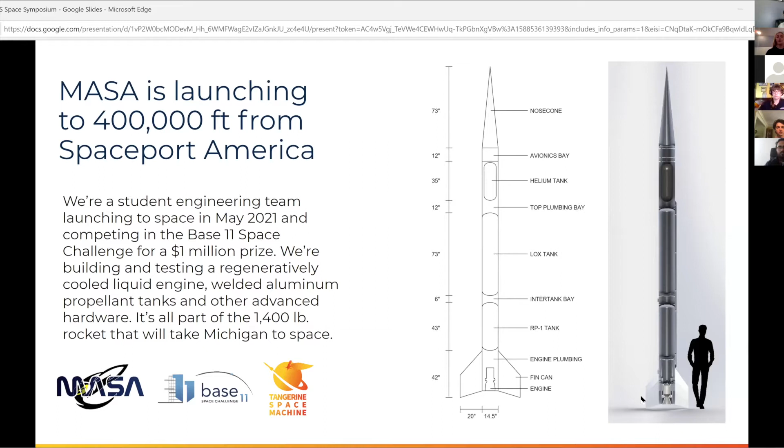So we are competing in the Base 11 Space Challenge for a $1 million prize. We are building and testing a 1,400-pound rocket, and we are planning to launch the Tangerine Space Machine, which we refer to as TSM, in May 2021. So TSM stands 27 feet tall and 14.5 inches wide. The engine uses RP1 fuel and liquid oxygen oxidizer. It effectively produces over 4,000 pounds of thrust, and it has a specific impulse of 211 seconds.

Our team is comprised of 6 sub-teams: Aerodynamics and Recovery, Structures, Propulsion, Avionics, Production, and Assembly, Test, and Launch Operations. The image above illustrates the main components of the rocket, and the sub-teams work on these components, and ultimate integration will lead MASA to a successful launch. So now Jack, our chief engineer, will discuss our work on aerodynamics and recovery.

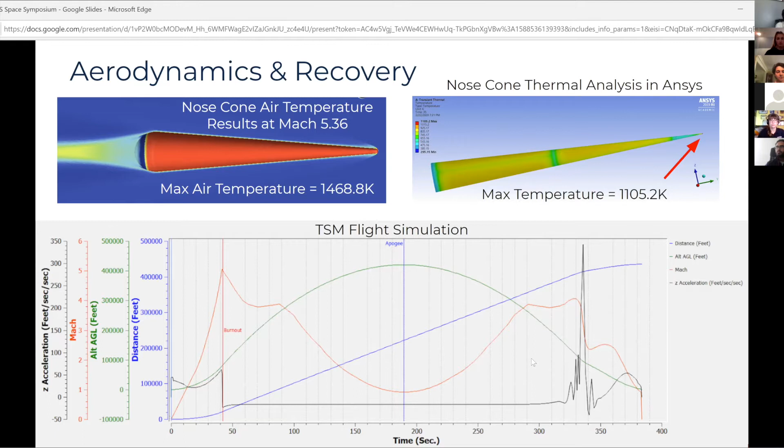Over the past year, the team has also made significant progress on fin design. The fins on the rocket are used to provide passive stabilization. We don't have any active stabilization. The fin design we have chosen is a 3-foot long trapezoidal fin. We want this design because it's easily manufacturable and it uses a continuous panel from the fin to the rocket body. So on the right there, you can see the render. That's all one piece that's bolted at the fin edge.

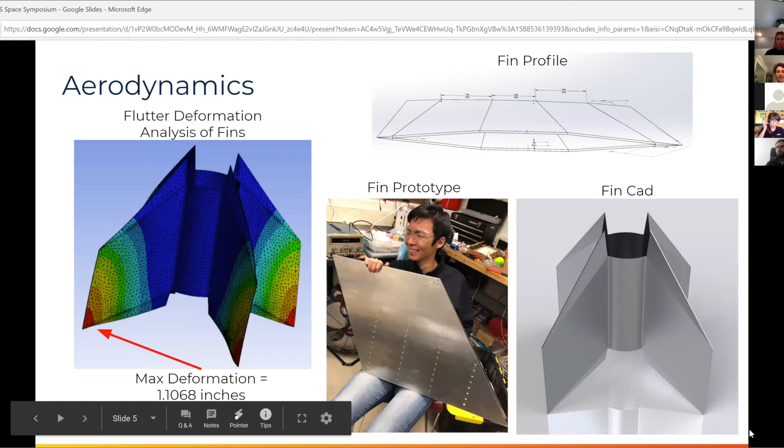But one of the largest problems designing fins is preventing flutter, which is essentially a high amplitude vibration. So on the left, you can see a picture of an ANSYS simulation that we used to predict the deformation of the fin due to flutter. The prototype, also pictured in the center there, was a small scale model that was very useful for teaching us about the sheet metal manufacturing we'll have to conduct to build the actual full scale fins. And then, as I said, on the right is a current render of the fin model.

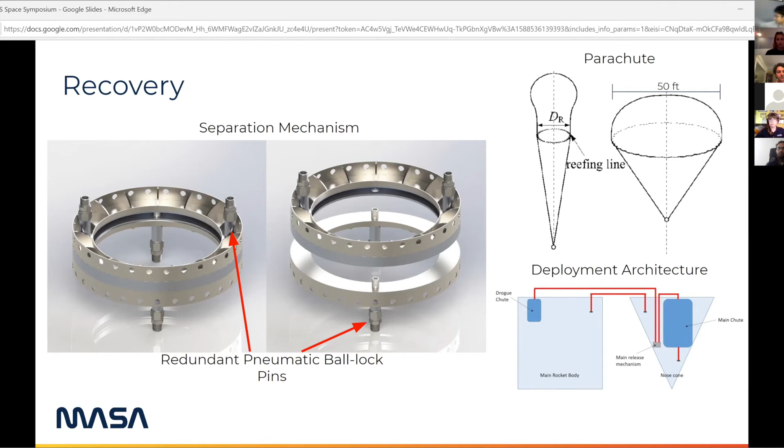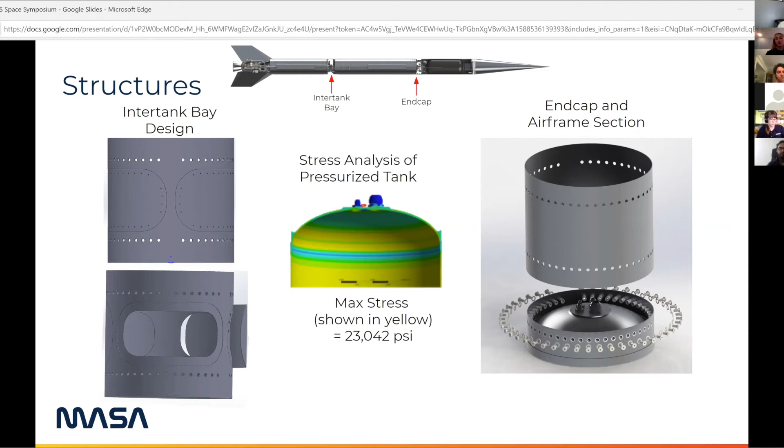The end caps were designed to withstand the pressure of propellants, aerodynamic stresses, and thermal stresses. We performed a simulation of an end cap under thermal and static pressure loads seen in the center image, and we found that the largest stress concentration is less than the yield stress of the aluminum, and therefore our results indicate that the end cap will most likely withstand the loads acting on it. And the image on the right shows how the end cap and airframe section will be assembled together.

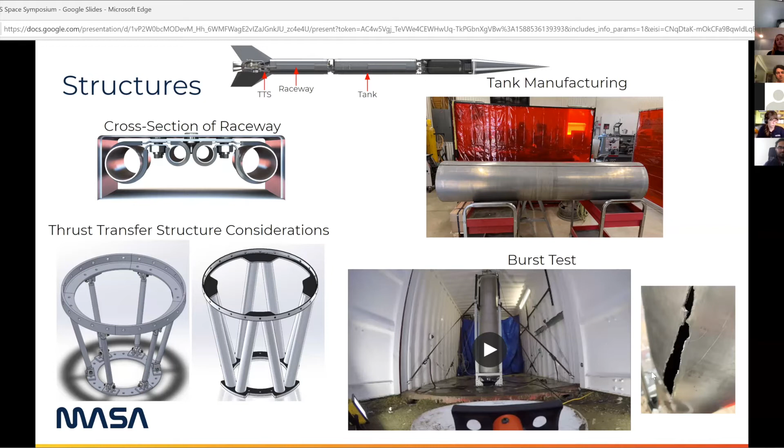PT-163 is our LOX ethanol engine, which we developed to further our understanding of fully liquid systems and help uncover any new concerns. All of the testing of PT-163 is conducted through a joint effort led by ATLO and the propulsion subteams.

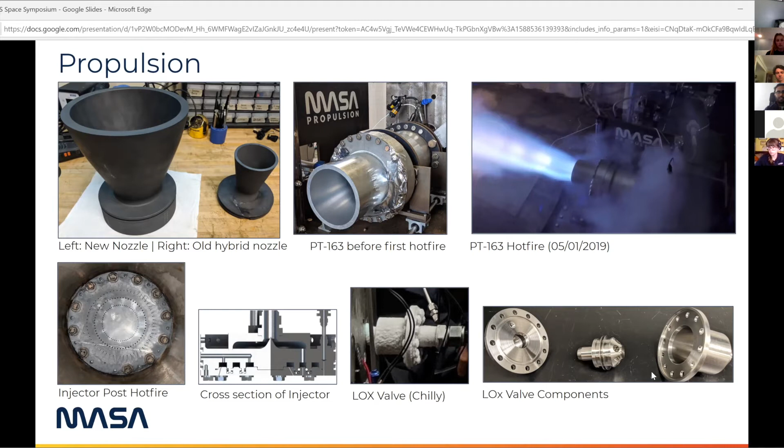All right, so here we have a more detailed view on the components currently being designed for our LOX RP1 engine. The CAD cross sections displayed are of the full engine assembly, the injector, and the LOX valve. Labeled with arrows are the fluid flow paths through the engine assembly. The cold RP1, which is shown in the red arrows, will flow up the chamber walls and absorb heat from the hot wall, decreasing the overall wall temperature. This is what makes the engine regeneratively cooled.

To ensure the validity of our CAD designs, we conduct simulations with both finite element analysis and computational fluid dynamics. On the right, we have results of FEA on prior injector and engine iterations. These specific simulations were performed to estimate the max stresses under loading conditions. Both of these simulations showed that our designs met an acceptable safety factor near 2.3.

In the summer, we will be finalizing the component designs and running similar simulations to estimate an accurate pressure budget and determine safety factors. We will be preparing to machine the required components and perform static test fires of the new engine in the coming year. Next, Paige, our social lead, will talk about the Avionics subteam and its work.

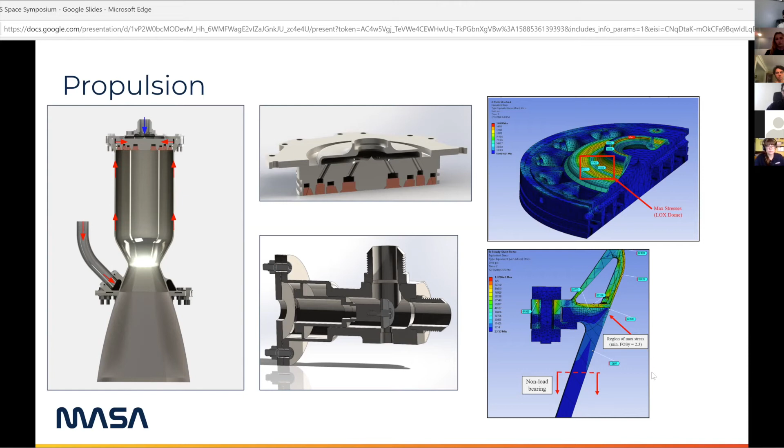Hi, so Avionics works with the electronics for Tangerine Space Machine to make things go, being responsible for controlling the different valves and motors on the rocket and ground systems, as well as the different sensors for reading the pressures and temperatures at various points on the rocket.

Some of the projects that Avionics has been working on during the last year include the system needed in order to conduct our tests, as well as the system for maintaining pressures in our propellant tanks as the propellant drains out. These avionics systems were what allowed us to conduct our hot fire and our burst test, as well as collect valuable data from it.

So, in addition to making things go, Avionics has the responsibility of collecting the information about what's going on in the system as things occur. In our testing campaign so far, it's been about reading sensors for pressure and temperature, as well as the thrust of the engine.

But in the future, it will extend to GPS tracking, altitude confirmation, and sending down the telemetry for TSM when we launch. The avionics also has to be smart enough to read the systems of the rocket and understand when it has to trigger an abort. Many members have been working to determine the different ways that these aborts can happen, depending on the failure mode of the rocket.

So here on the slide, we have two architectural layouts for different control boards and the systems of TSM. We'll start at mission control where we'll be at, far away during the launch. And as we communicate with the rocket, it will tell us things about its location and some necessary sensor readings.

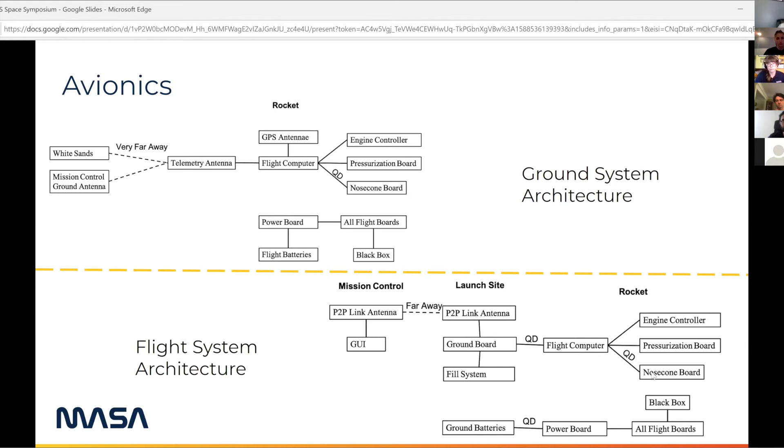So the production subteam is a crucial one to the team, as they are responsible for the actual fabrication of many of our components. As a result, the work here is obviously extremely hands-on. And the photos here are some of the components machined for the project since we've begun, like our main propellant valve on the left, and on the top right, we have our tank end cap, basically a giant cereal bowl.

But there's a lot of time, skill, and knowledge that our team members get to develop in order to be able to interpret the drawings of components and actually machine the parts to make the ideas of our team a reality. Many of our crucial systems are actually designed and manufactured completely by students and are in-house at the Wilson Student Team Project Center on North Campus.

In the next year, now that the bulk of the designing is almost done, the production subteam will be in charge of a lot of the manufacturing of our components before their testing phase. Related to that, I'd like to introduce the ATLO lead, Alfonso, to talk about ATLO.

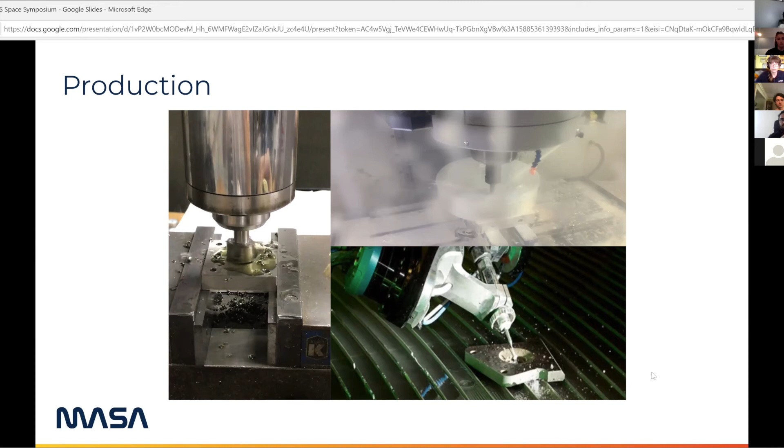The Assembly, Test, and Launch Operations Team, or ATLO for short, is responsible for designing ground equipment, testing components, and bringing the rocket together for launch. Here you can see the inside of the testing site, which is a shipping container that we lovingly call the bunker. The middle two are pictures of our fill system, which we use to flow gases and cryogenics into our tanks from outside the bunker.

This past year, ATLO renovated the bunker, constructed a new stand to hold larger fuel tanks, conducted a burst test with structures, and conducted various types of engine tests with propulsion. Two of the most significant tests conducted were cold flows and hot fires. During cold flows, we test the engine at lower pressures and without ignition, while during hot fires, we use flight pressures and ignite the propellants. This year, we conducted the third hot fire of PT-163.

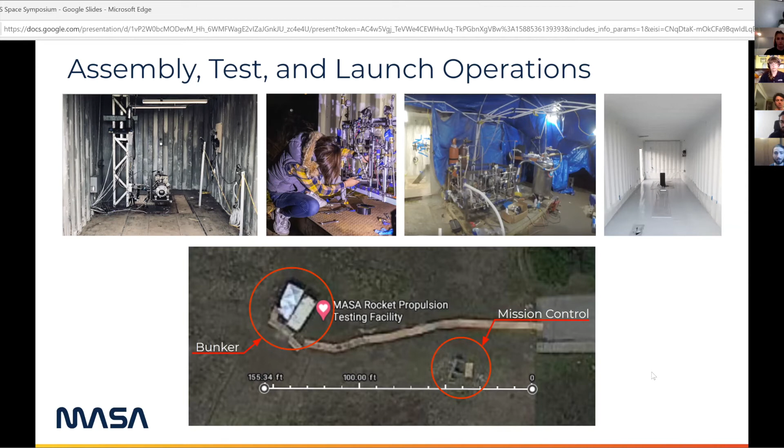Here you can see our engine during a hot fire. The engine is mounted to its test stand, secured to the shipping container by a large I-beam. To the left of the engine is our tank stand, which feeds propellant into the engine and prevents tank pressures from reaching dangerous levels. During this hot fire, we reached 2,650 pounds of thrust, breaking the collegiate thrust record.

The image is so shaky because the test was a little more powerful than expected, and our camera mounting systems weren't prepared. However, this picture doesn't do hot fires justice. They are much more impressive when seen live on our YouTube channel, and even more so when seen in person.

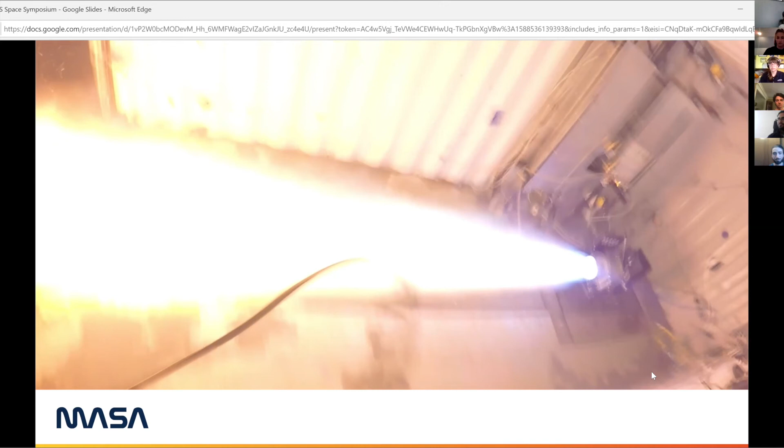However, impressive images like that only come after days of preparation. Setting up for such a test involves moving materials to the bunker, integrating the engine and its avionics with the test stand, ensuring mission control is receiving information from the bunker, and handling high-pressure cryogenic systems, all while making sure that our members stay safe.

As we move out of the design phase in the coming year, ATLO will become increasingly relevant, tackling projects such as vibration testing, cryogenic level sensing, active pressurization, testing of custom valves and the new engine, and many more.

Among these projects is designing the high-pressure flight plumbing for TSM. This plumbing must first interface with ground equipment to prepare the rocket for flight. Quick disconnect mechanisms visible in both the intertank and helium bays must then detach the plumbing from the ground equipment. During flight, the plumbing delivers propellant to the engine and pressure into the tanks and valves. The plumbing system will also separate the nose cone from the rocket upon reaching a certain altitude.

However, it also has to be lightweight, compact, and shock resilient. As you can tell, this is an incredibly difficult design task. Over the summer and the coming year, ATLO will tackle this challenge along with many others, doing our best to ensure that all hardware is tested and ready for flight as soon as possible. Jack will finish up with an overview of our timeline for the upcoming year.

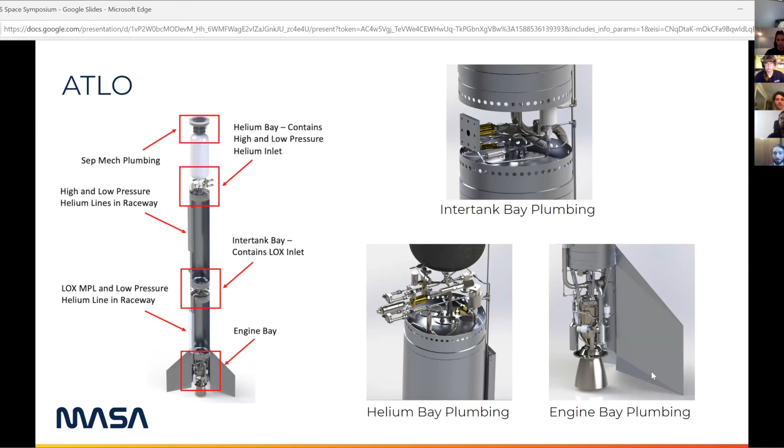Yep, so in conclusion, we're in the final 12 months before launch here, so that's pretty exciting times. We have a lot of things planned, but really by the end of the summer, we want to be done with most of our major design work. Around October, we want to have the first ignition test of our new engine, as well as test the avionics systems with it. And then in January, we want to do a full duration test for the engine.

And then in April of next year, we want to do a full stack where we basically have the entire rocket fully stacked, and then we clamp it down to a pad and then fire it there. And that's the last checkup before we launch.

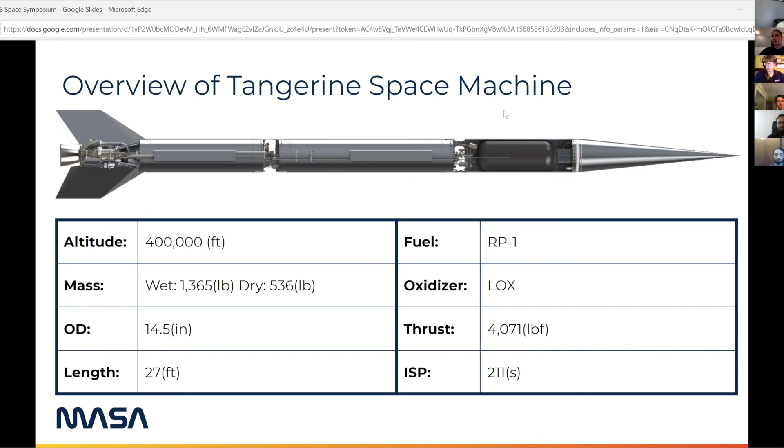All right, there's a few other questions. Has MASA ever considered a plane-launched rocket mission, such as Virgin Orbit LauncherOne? I don't know about the past, but maybe in the future. This is our biggest challenge yet, doing a single stage bipropellant liquid rocket. So we're always looking to do the next big thing and to keep progressing. And we always want new challenges and to not just keep doing the same thing and to always push ourselves. So that's definitely something that we could look into in the future.